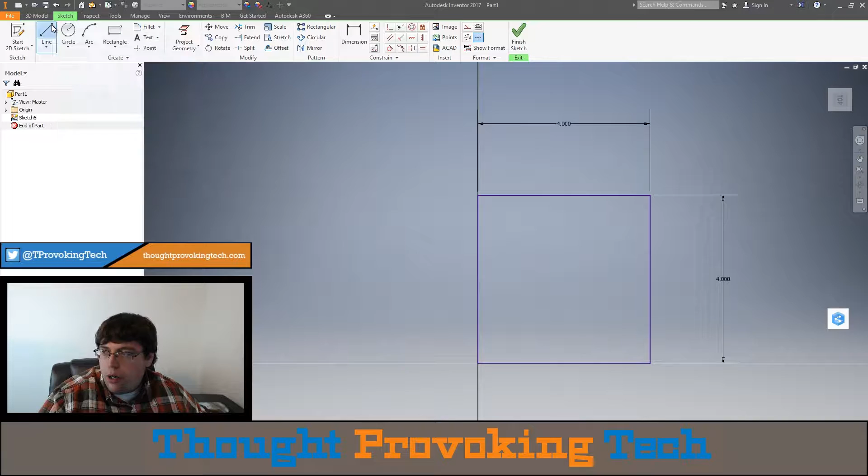So let's go ahead and get started. I'll go ahead and design it at a 4-inch line, but since it's pretty much just pixel art, it should be able to scale up and down pretty easily depending on the capabilities of how big your printer bed can print.

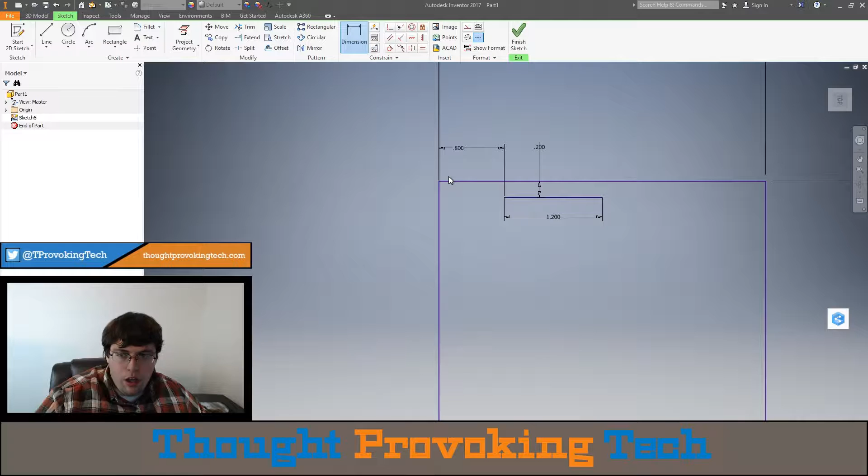I'll go ahead and start with a line that is 1.2 inches long, and I'm going to dimension it 0.2 inches. So what I'm doing is, in my mind, I'm essentially dividing this top quadrant into grids and designing from there. Right now I'm laying out that top part, and I'm going to do stair steps until I get to the point where I'm meeting back up with this.

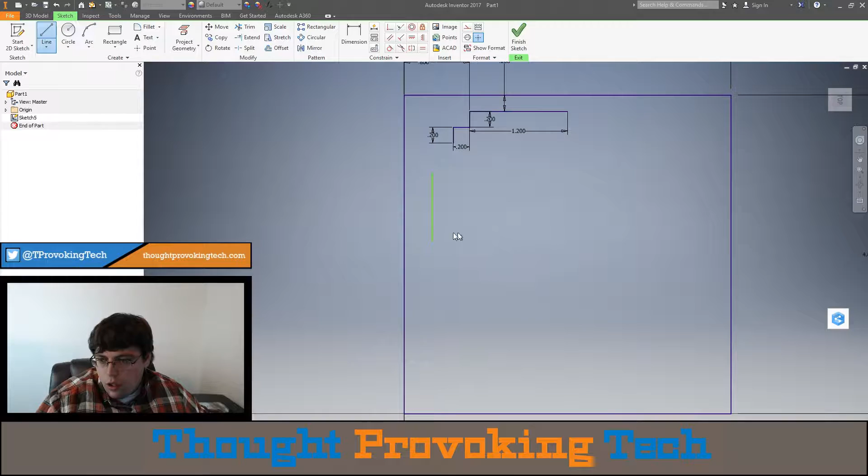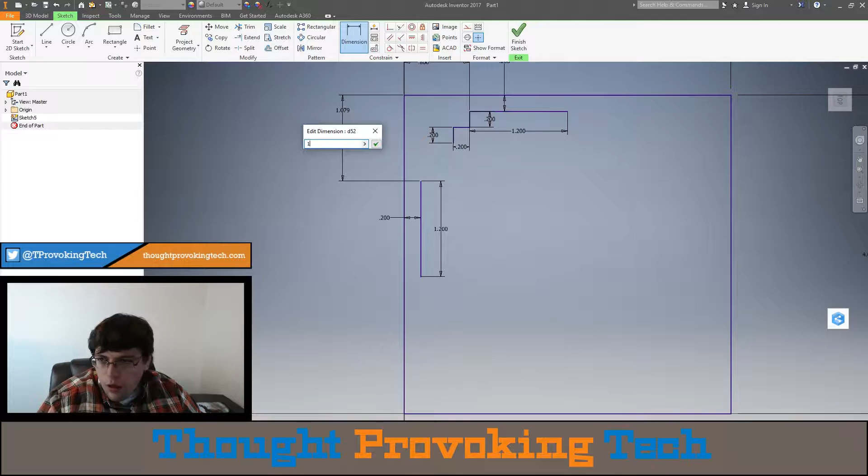So I'm going to go ahead and do my other 1.2 inch line. That did not take—start that again. 1.2. Okay, and dimension that. So I can now finish my stair step, and it should meet this perfectly. And it does.

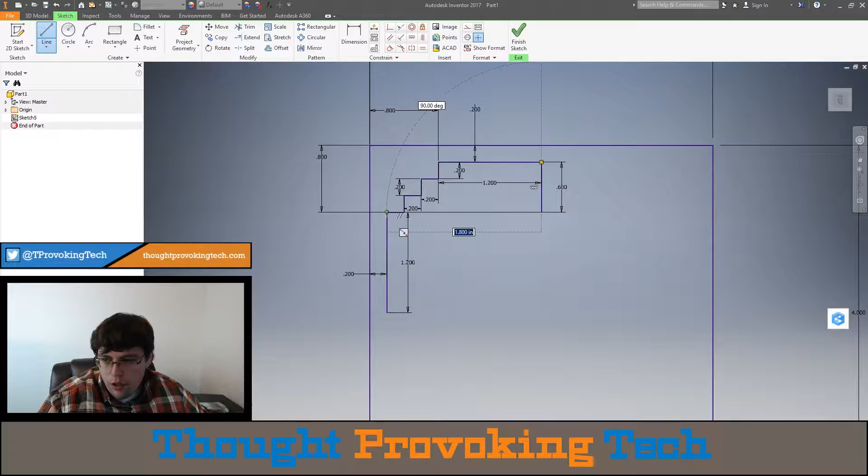Alright, so beyond that, I'm going to go ahead and extend that. Let's go ahead and do 0.6 to kind of make that equal with the part right there. It seems to be pretty much equal—let me move that so my webcam isn't covering it up. It seems to be pretty much equal with the part that comes down in the center, pretty much equal with the little stair step piece right there.

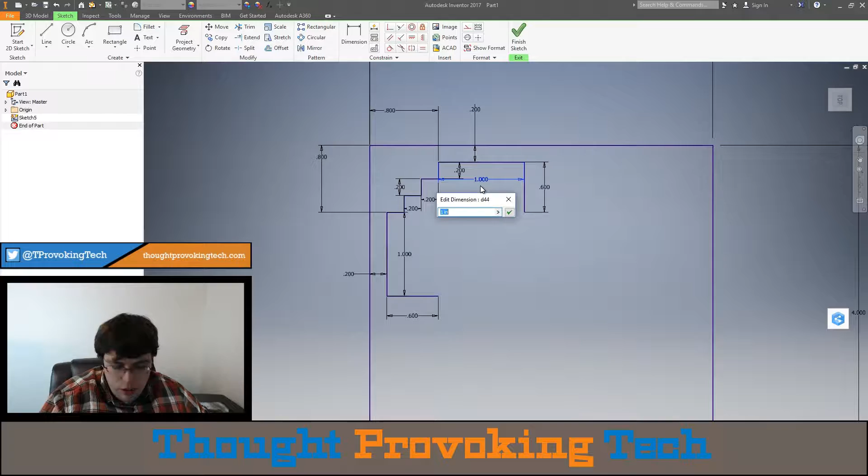And then we're essentially going to do the stair step once again, but I'll do the same thing down at the bottom, just so I have something to meet up to and I don't overshoot my target. That will give me, at the center, actually 1 inch, because I do want that middle center line to have some thickness. So essentially my center line being 0.4—I might end up making that 1.1 and making it a 0.2 line. Yeah, let's just go ahead and do that, 1.1. That might cause issues with lining stuff up in the grid though. We'll see what it does.

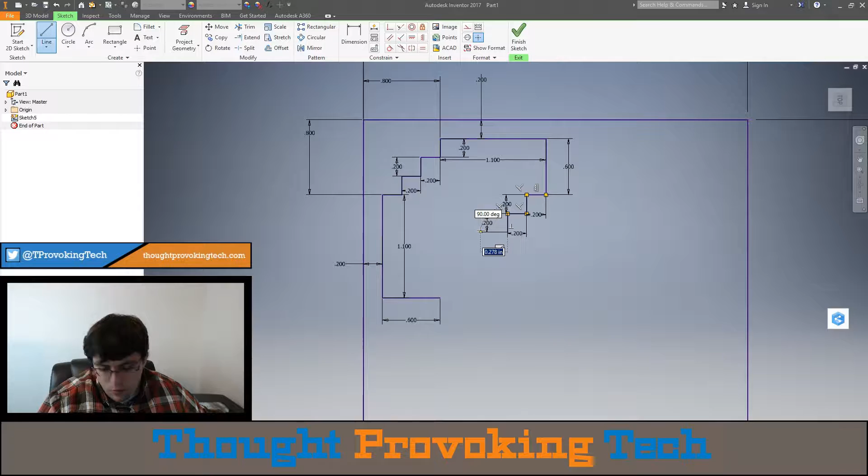So just building my stair step all the way down, and can't tell yet if it's going to have issues. Okay, so let's go and make that just 1.

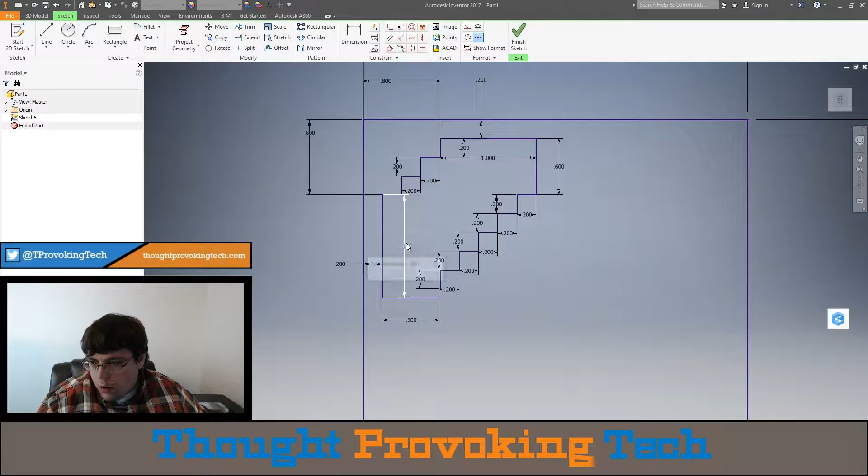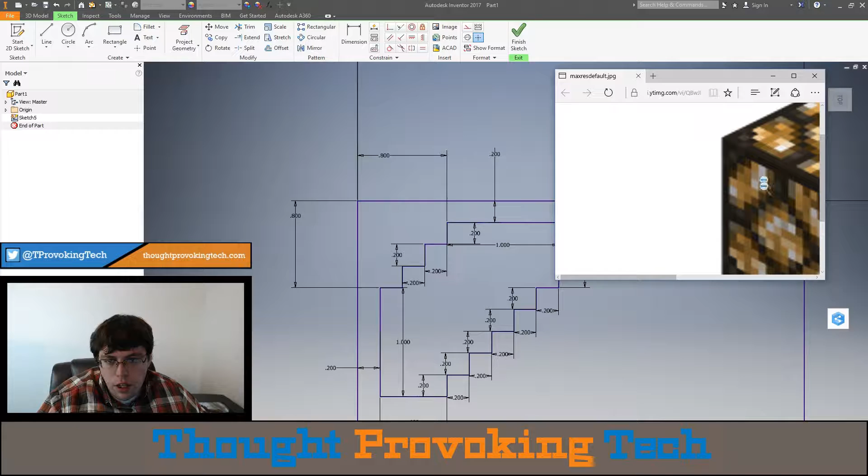Okay, we're good. Now we'll make that center column come down as well as the horizontal ones in the center. This is going to be 0.4 wide, so it'll be a little bit wider than the edge pieces, but it does look like it might actually be a little bit thicker than the edge piece. It is just pixel art, and we're just making a rough representation of what you actually see.

So we need to now - the center line of our bend is here. We essentially need to allow that to have some thickness, and so the 2-inch mark should be right there.

Okay, so imagine that coming over and up, and our first line needs to be here, and 0.2 up, and then that needs to be dimensioned from here to be at 2 inches, and from here to here it needs to be 0.6. Yep, perfect. Okay, and now we just need to do the same up here.

Should go perpendicular to that, 0.2 inches. Distance from here to here should be 1, perfect. And the distance from here to here should be 2 inches. All right, and those will hopefully line up perfectly when we do our stair step.

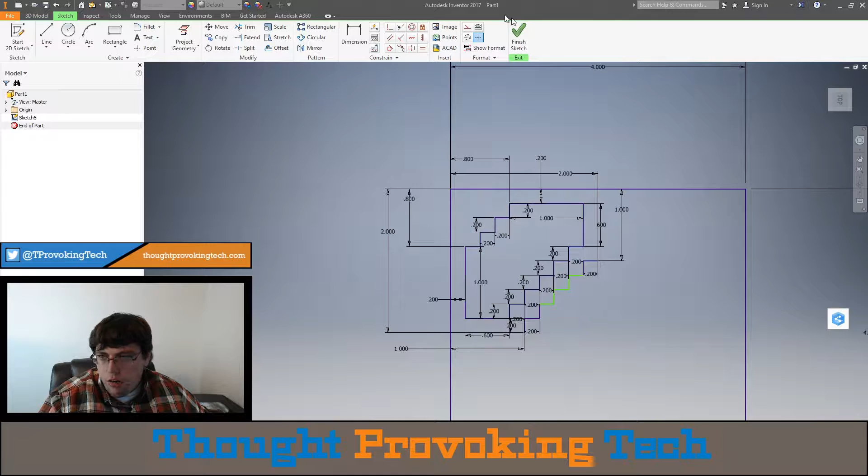Perfect. All right, so we're essentially now ready to do our mirror, and that will essentially get us to the stage where we have a finished part.

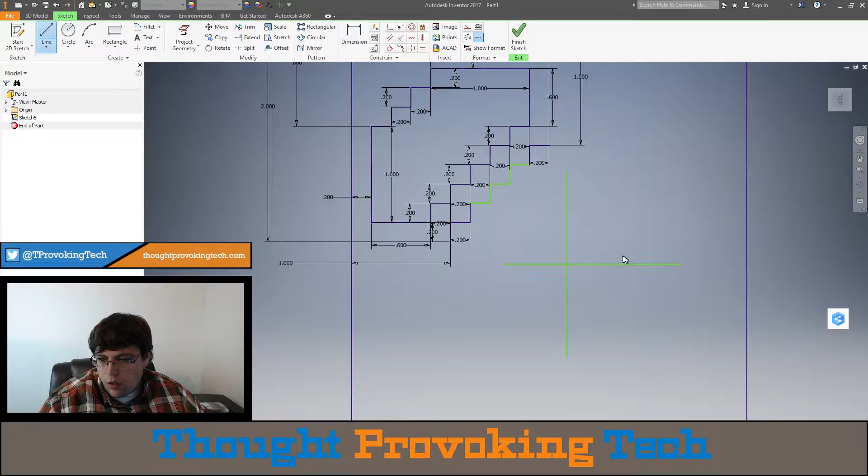So go back to the sketch. I don't know why I finished that. And essentially need to select this. Let's go ahead and do some reference lines though. And these are just for our mirror lines. I could do construction lines, but I'm just going to delete these here in a second, so they're going to be irrelevant once I do my quick mirrors.

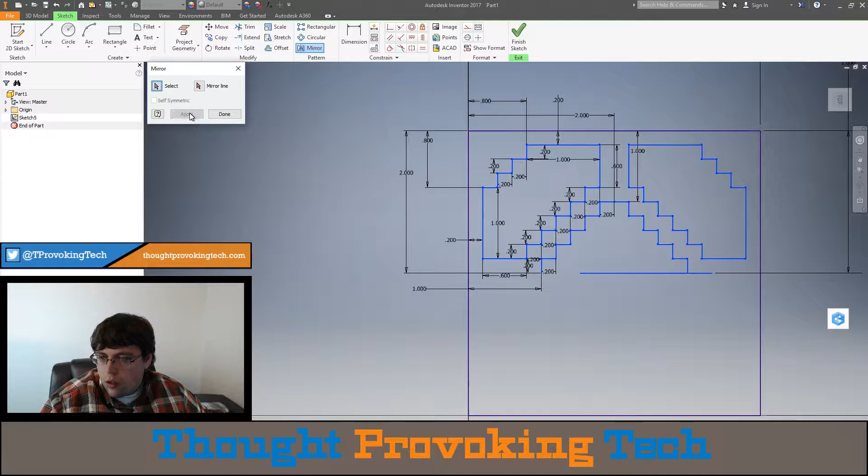So I'm not done with that one. All right, so we should connect there when we do. It doesn't look too shabby at all. Let's go ahead and finish the sketch.

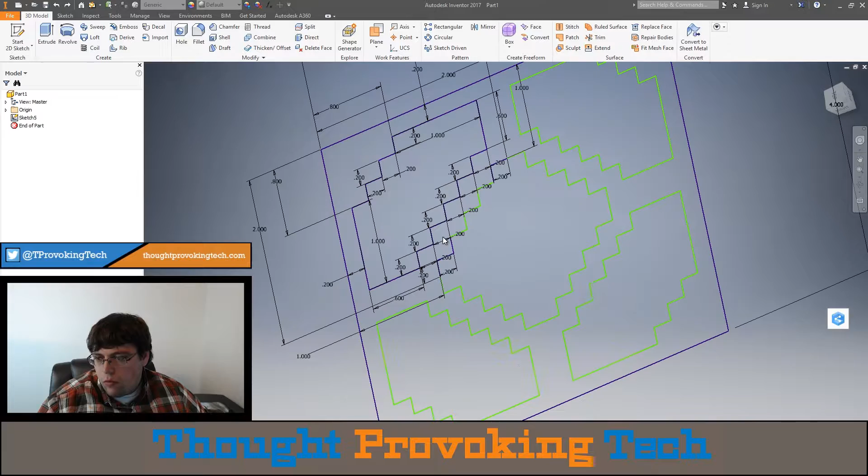Let's go ahead and extrude this part. That isn't what I wanted to do. Alright, so let's try extruding these pieces first.

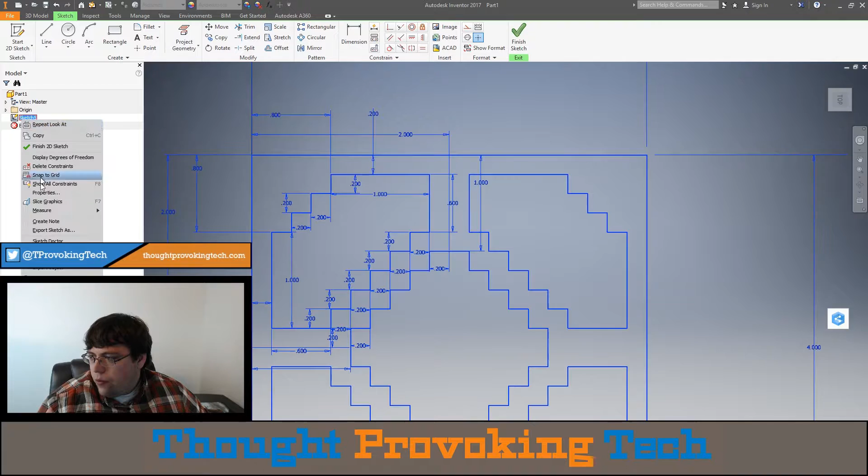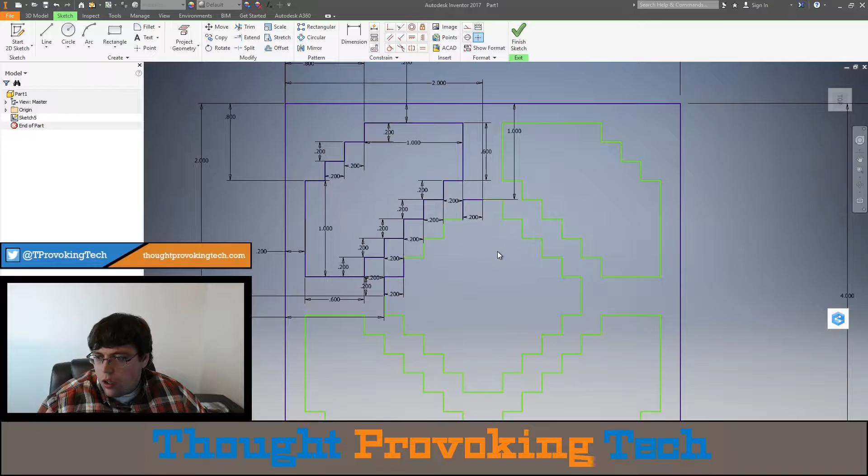So there is a quick issue. Looks like there might not be something closed in the lines. We have an open loop. Alright, so let's undo our mirrors real quick.

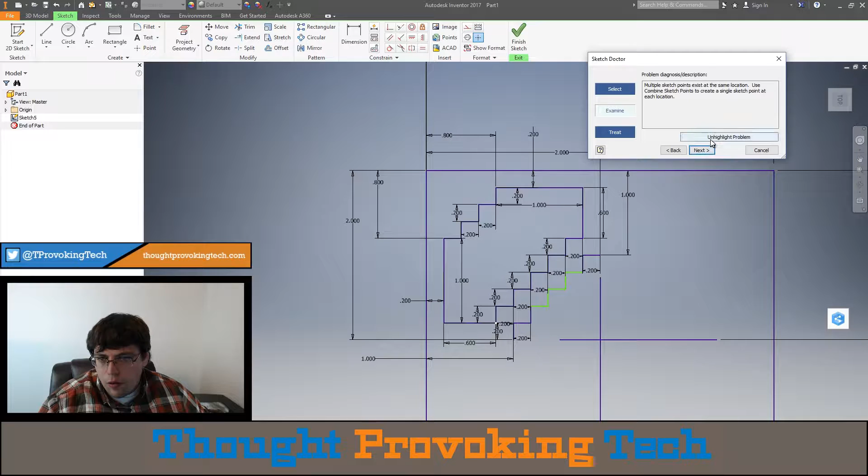Alright, I don't know why it's giving me an error there, but sometimes it's just easy to delete and start from scratch.

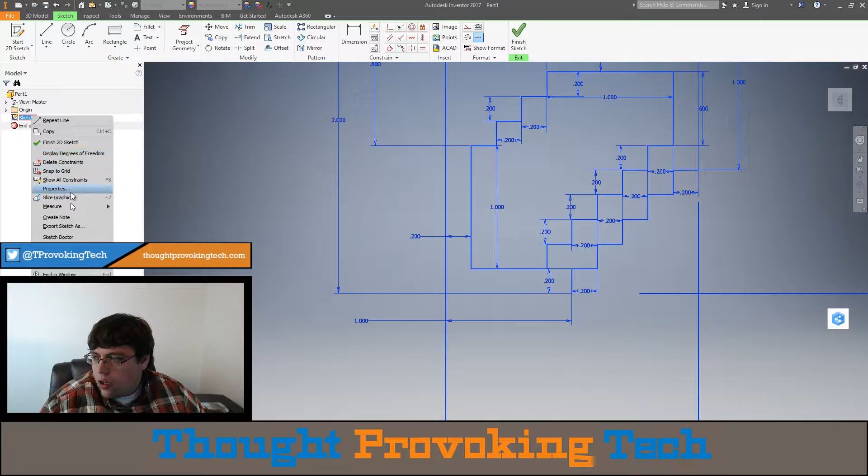Alright, so open loops, but those are supposed to be open loops now. So it looks like I have the problem solved. At least for now.

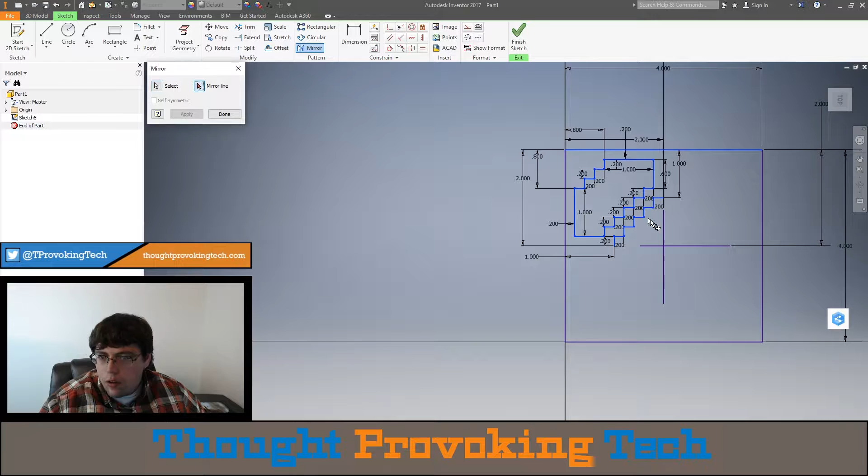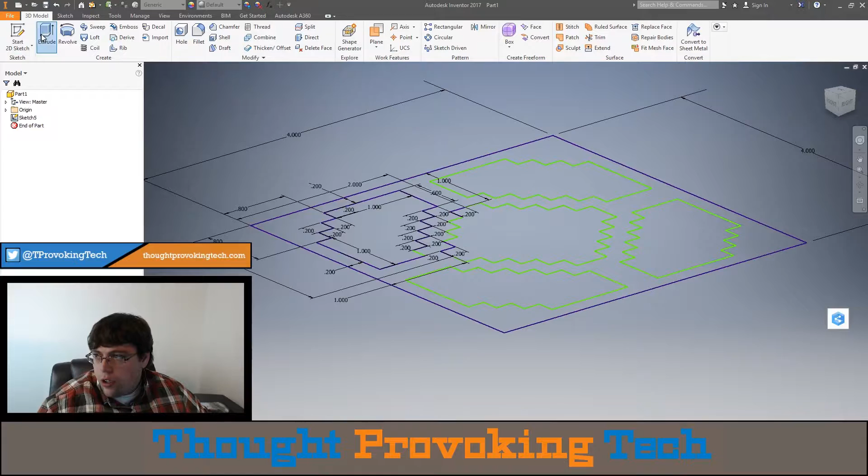And once again, redo our mirrors. I guess I should have checked that just to double check. And now we should be able to extrude and not get everything. And that looks better. A lot better.

Okay, so let's go make the wood part of this a little bit thicker. We want to make it 0.25 inches. And then we're going to go ahead and make that sketch visible once again. And then we're going to extrude these as a new solid, and do 0.125 inches on those.

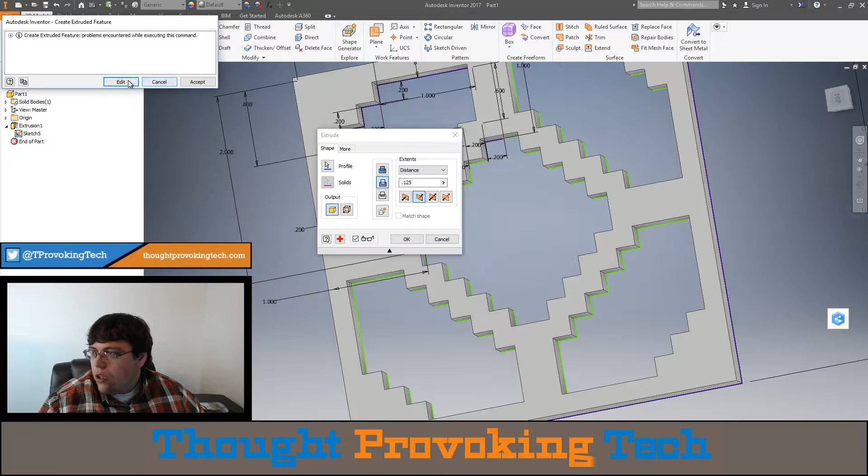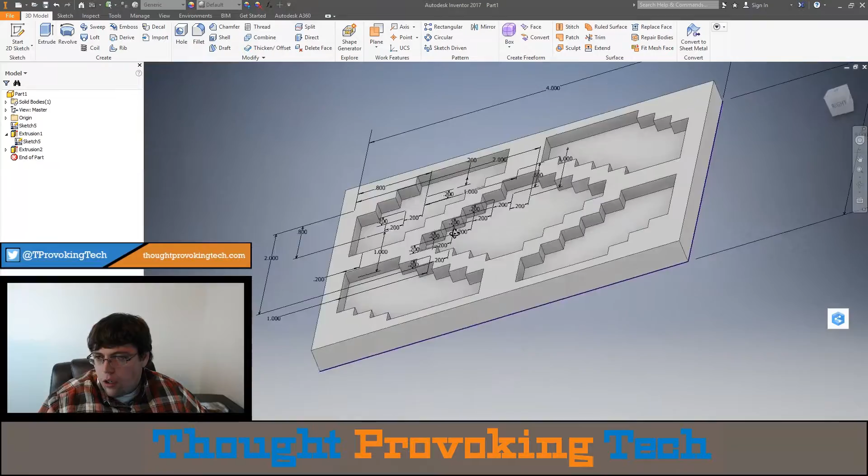All right. Did I not select my faces? Maybe not. All right. So you have quite a bit thinner piece right there. 0.125 versus should be 0.25. Correct. Okay.

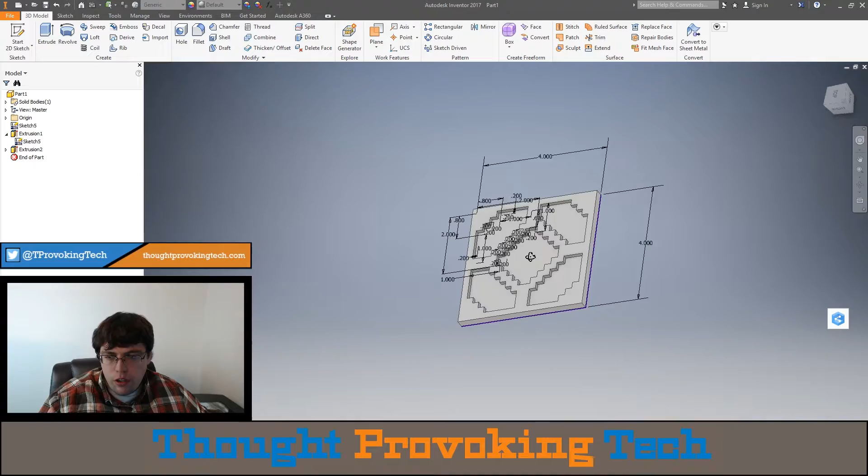The 0.125 might still be a little too much. It's 1/8 of an inch. But we'll see how much light it actually lets through. I don't want to have a ton of light through, just more have a soft glow. Not really going to be actual lamps, more of a kind of a scenery type item.

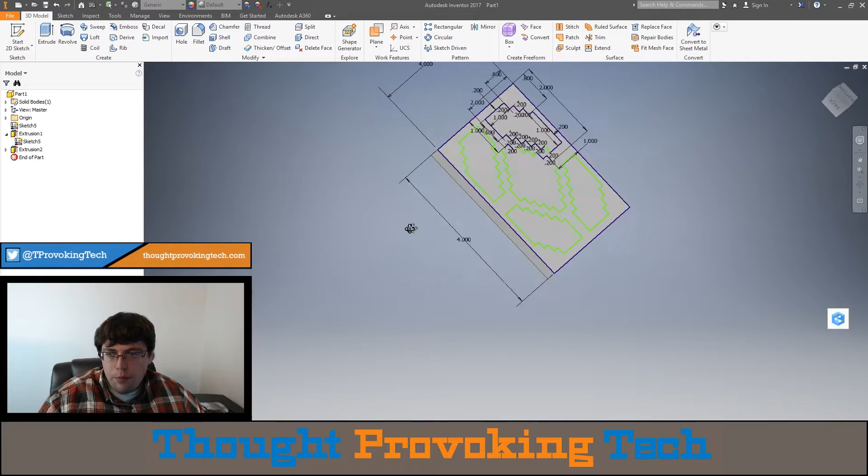Okay, so we should have two solid bodies. Oh, I forgot to do the solid body. All right, and it freaked out there for a second, but everything looks good now.

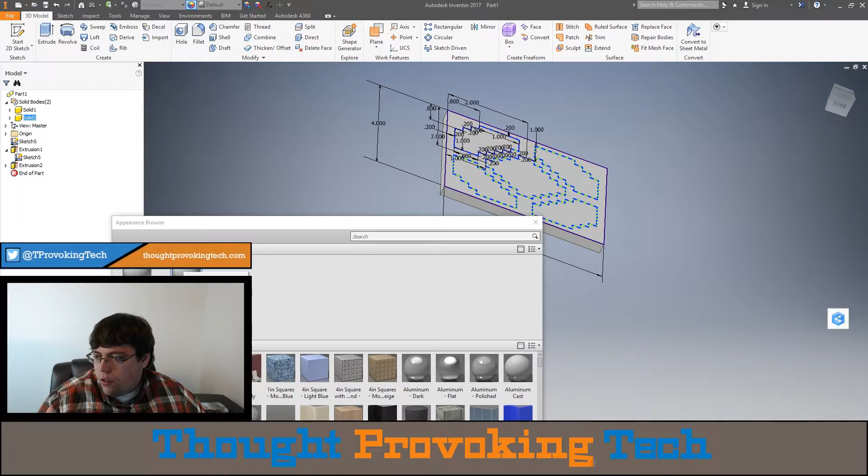What I will do real quick is - I have no idea why it's doing that. That's weird. Just going to edit this real quick and make one of these yellow, just so we have - make it easy to determine the two differences.

Oops, I didn't mean to select image. Let's go and give that a brown-ish color.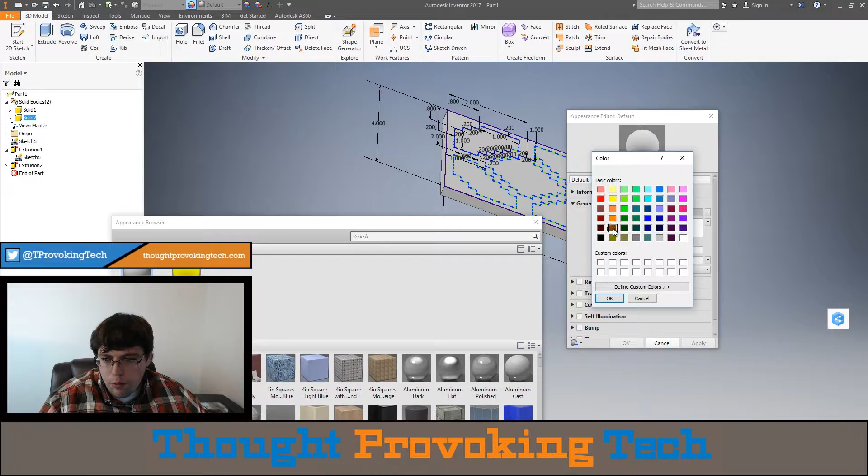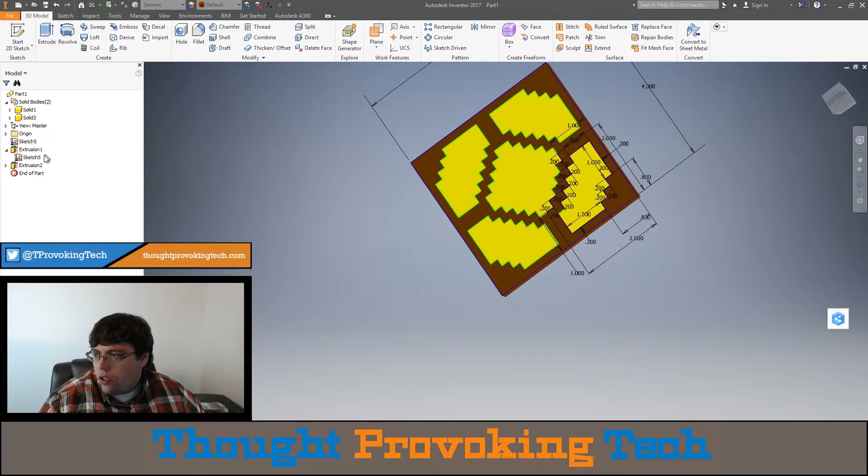Alright, so let's turn off the visibility of that sketch and look at this in reference to our design piece or our reference image. It looks pretty good actually, so I'm pretty happy with that design.

So now I'm ready to go ahead and extrude up our walls and the edges, and essentially make sketches on the other 4 sides.

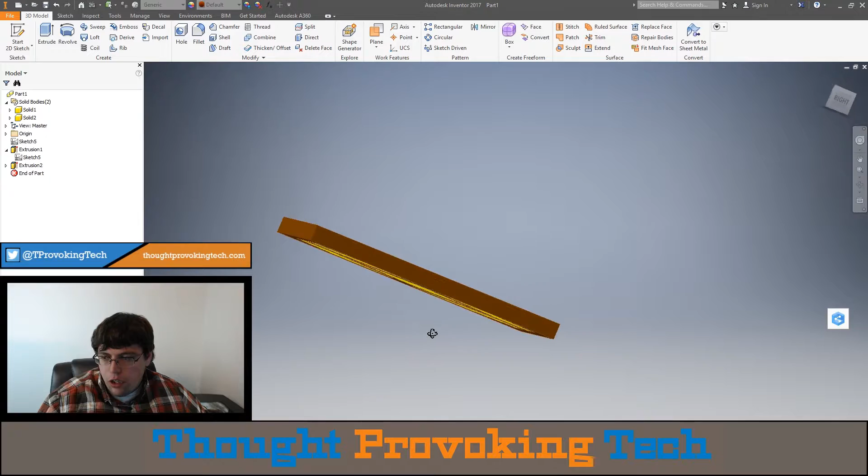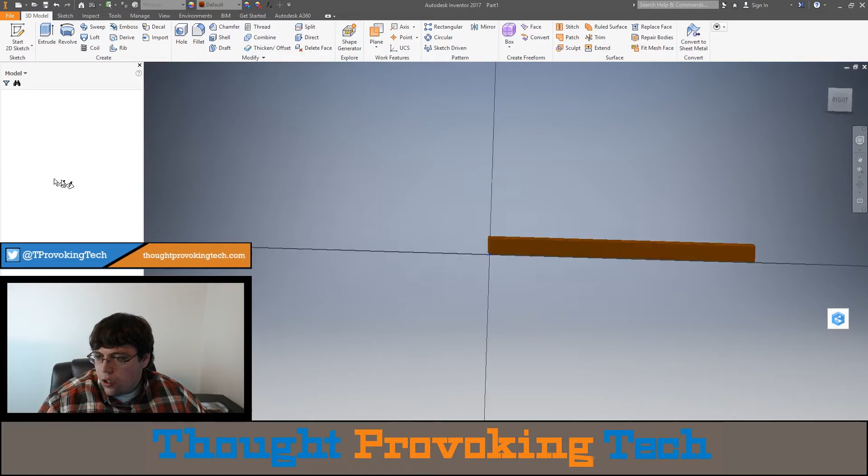Let's go back here and copy all this data. Erg is annoying. Let's move that base point right there.

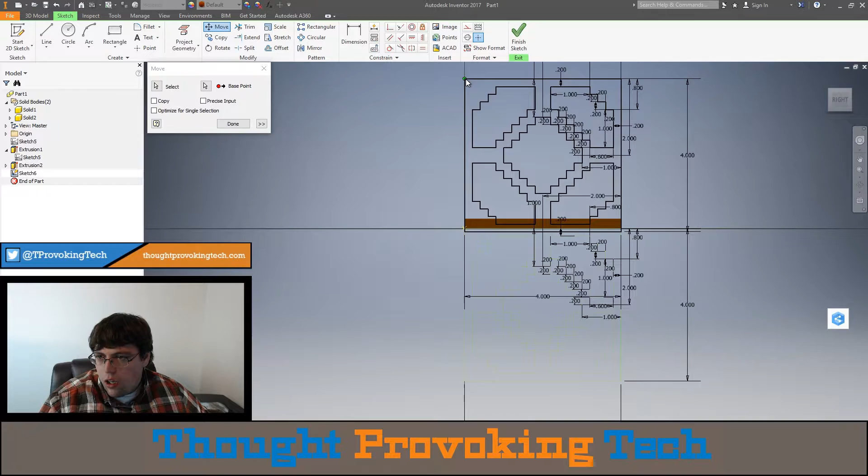Actually, move, and the base point should be right there, and I should be able to select that. There we go. And once again, man, I don't know why it's doing that. It's annoying.

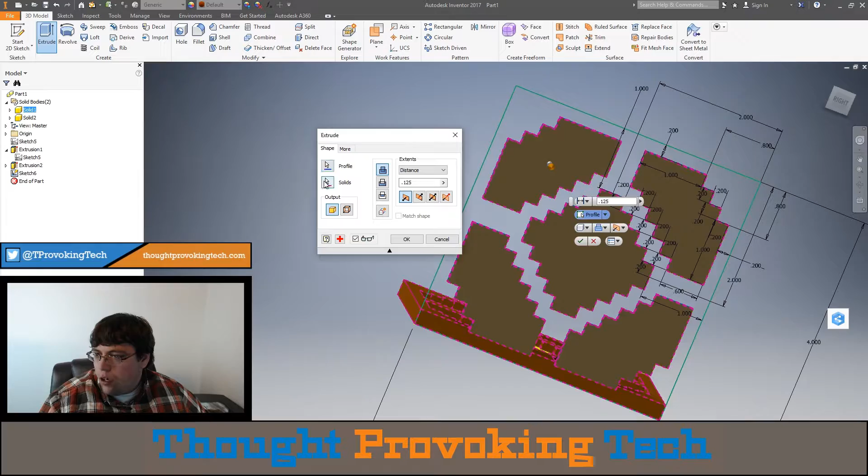This needs to be part of this solid, not that solid. And see which way it's extruding it. Let's go in, okay, and then make that sketch visible once more.

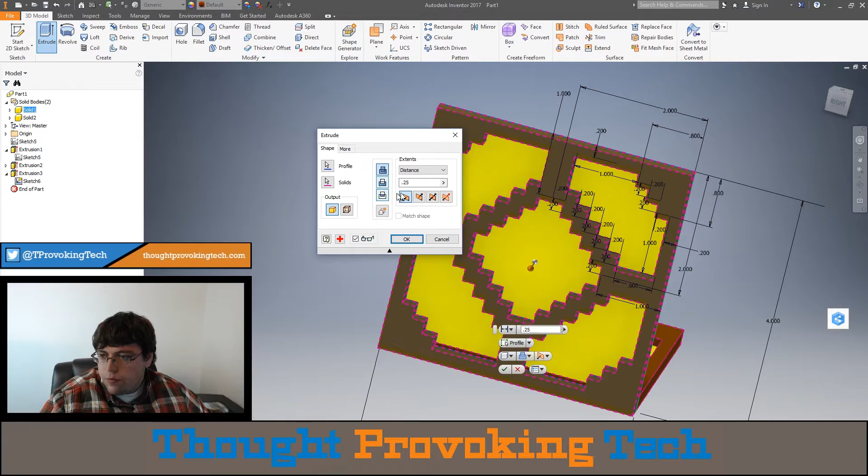And extrude that part in to 0.25. Move back that direction, and it should be in solid 1. Did I cancel out of it?

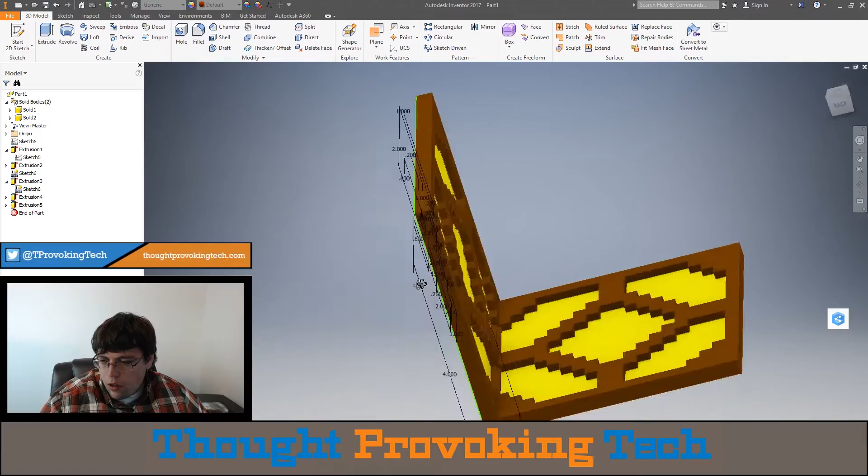Okay. Looks good. Essentially, you need to make that sketch. Essentially, just go ahead and do our sketches real quick, and then we'll do our extrusions.

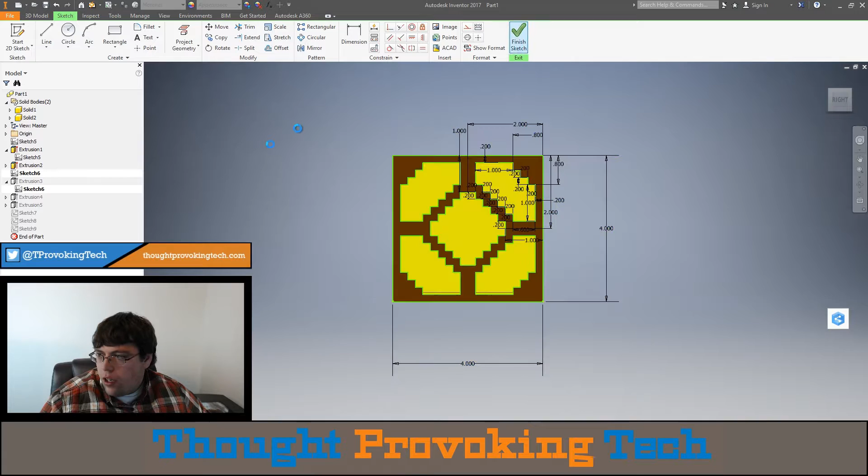Okay, you have that data copied, and we'll go ahead and remove visibility on that one and go ahead and apply this data. Perfect. Finish that sketch.

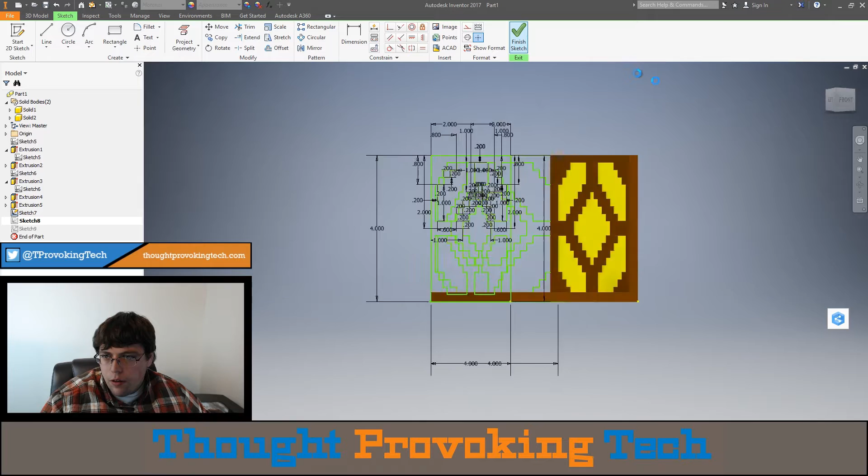Perfect. Alright, so we essentially have the rest of the material that we're going to be doing, and we just need to go ahead and start extruding.

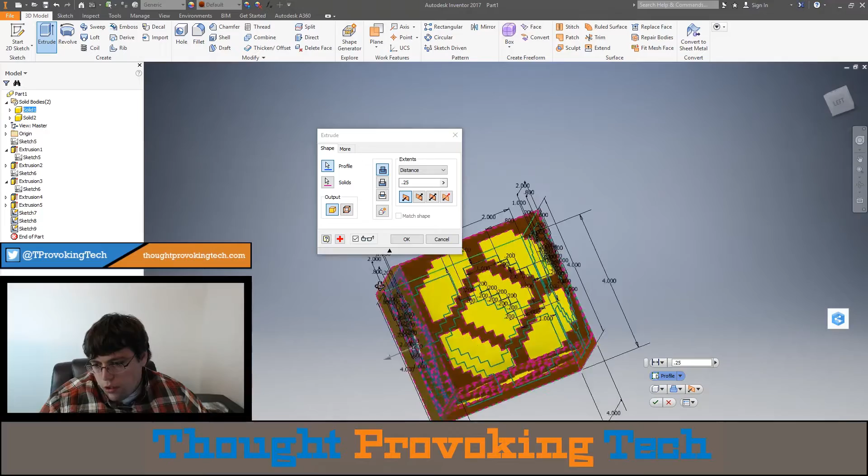I should be able to do all the 0.25 inch parts all at once now. I don't want it to cut though. Visibility back on. One more.

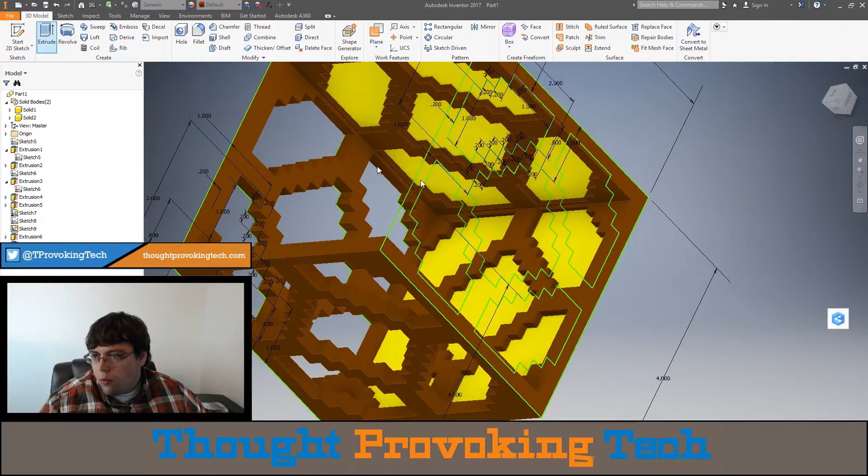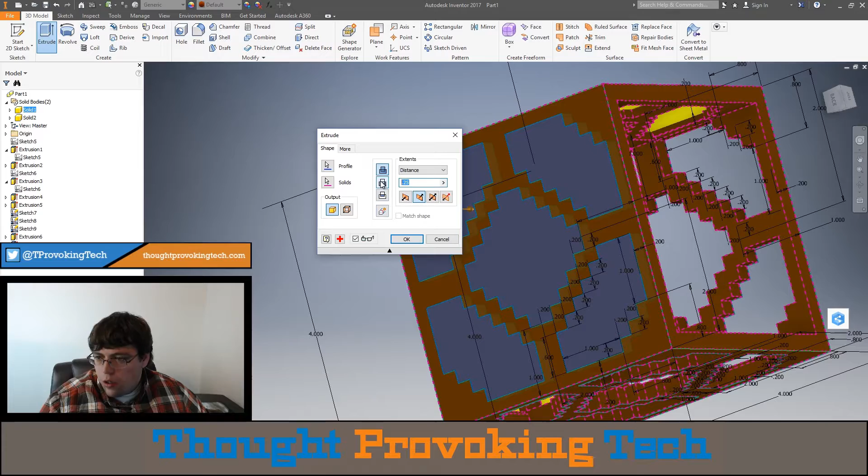Alright, turn visibility back on these 2 sketches real quick. And we need to do the final extrusions. And switch to solid.

So it seems like it stopped freaking out down there. I don't know what was really causing that at all.

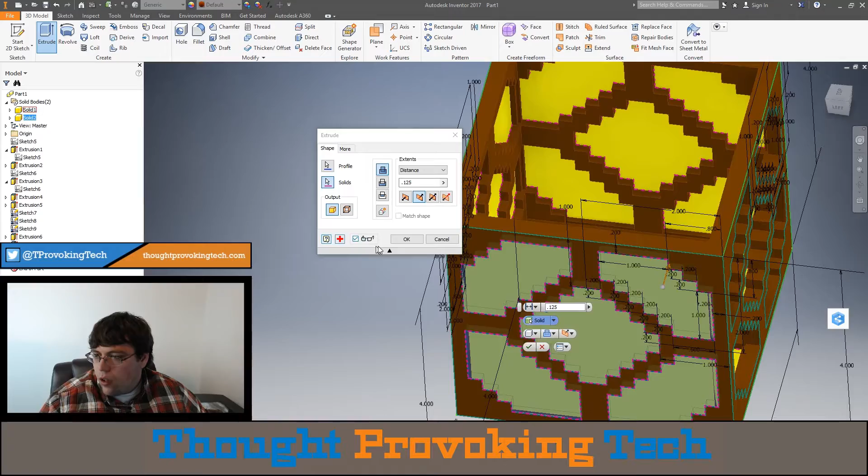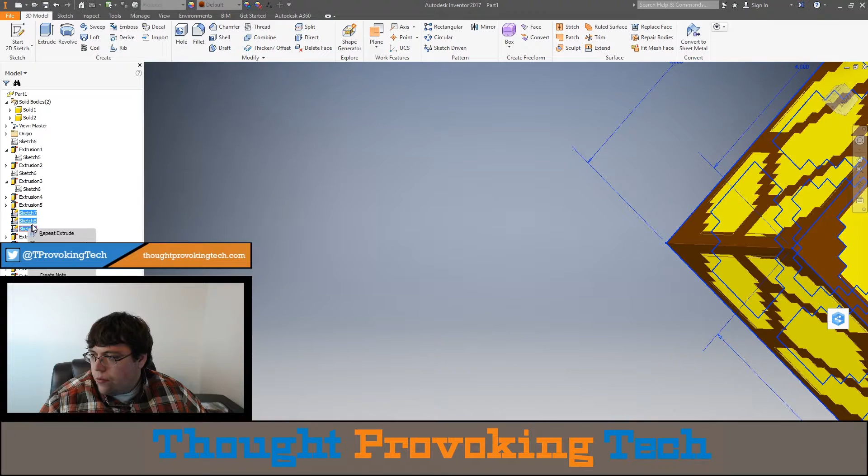All right, so we quickly have, let's turn the sketches off. We are able to pretty quickly prototype that out. I think it looks pretty good, pretty close representation of what we're actually looking for.

Those are a little bit thicker lines than the outside lines, but I really don't see an issue with that at all. Let's go and pull that part back up and expand it a little. Look at this from this angle.

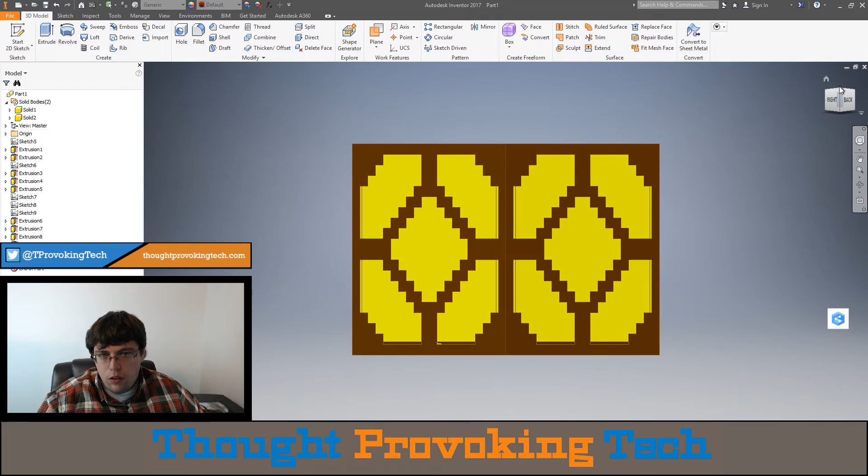Yeah, looks pretty good. All right, so that's essentially what it's going to look like. We'll just have a two-tone one. It won't be quite as complicated as theirs is. They have multiple different color tones in theirs, but it should look pretty cool, I think.

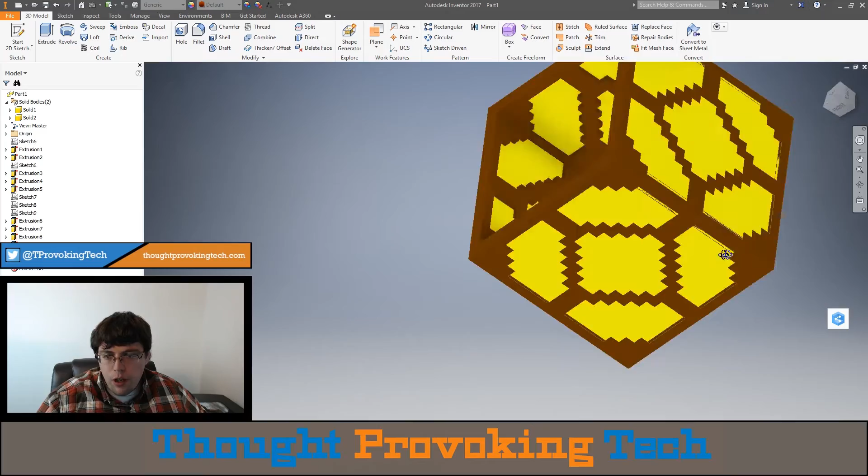One last thing I want to do is find a way for the base piece to go on and snap, but I really don't want to do overhangs here with the wood filament, just because I don't know how well it will do overhangs and supports.

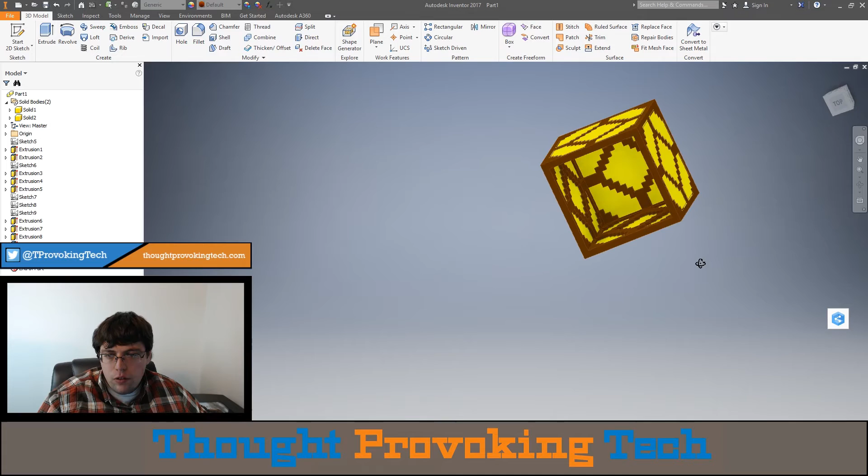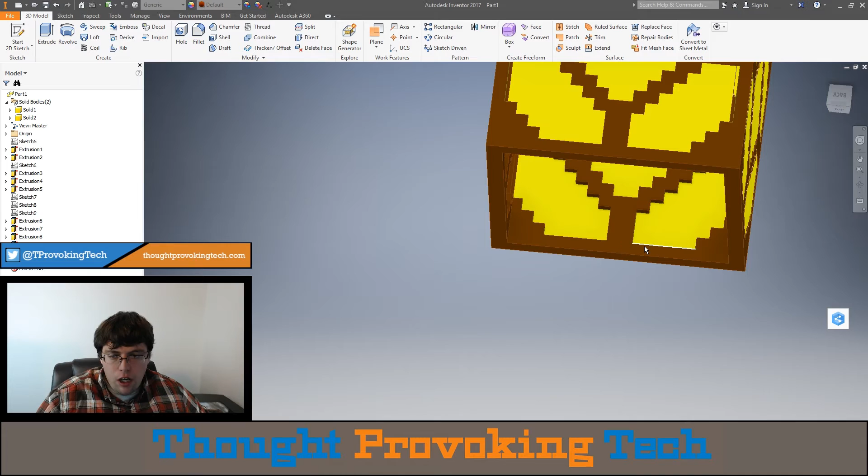So essentially what I think I'm going to do now is I have a good prototype. I could always make the base piece kind of flare out after it goes in a little bit, and kind of hold on to this a little bit maybe, just so it has a little bit of a snap, but not a really tight snap.

So just kind of come out, and then when it reaches the point where it's past the wood, the yellow filament isn't going to be as far in, so have a little tab maybe that kind of snaps and holds it, but you should be able to, if you put a little bit of pressure and pull it out, it should let it go because it won't be a huge tab.

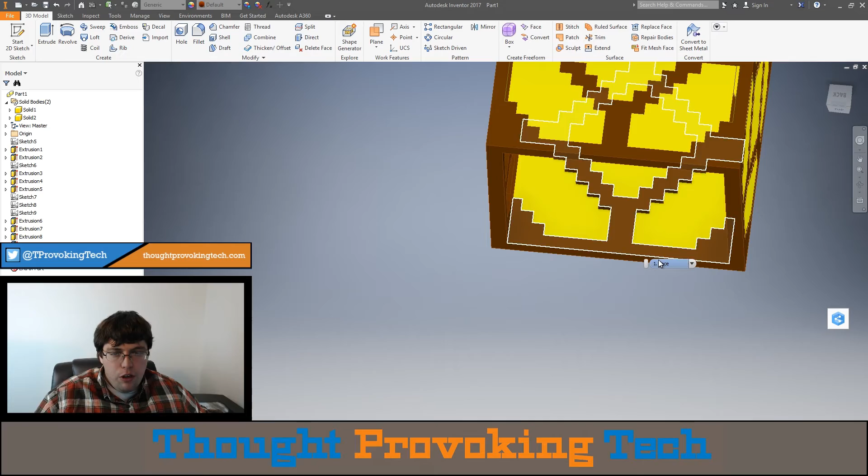It might be something I try doing in the base piece, but that'll be something I'm going to do later. I'm going to go ahead and at this point try to print this and see what happens.